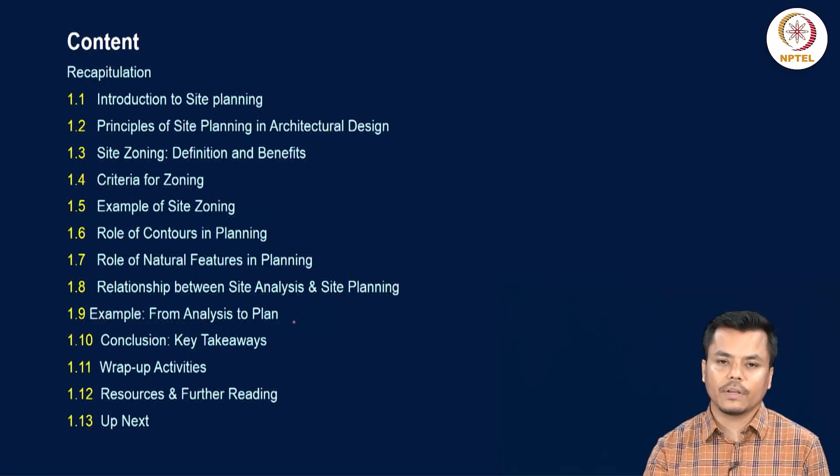To give a recap of what was covered in the previous presentation: we tried to understand what a design concept is and how we can develop a design concept for the various types of projects selected for architectural thesis or architectural design courses. We understood that the design concept is a central idea that directs architectural development and the decision making process. Its importance highlights its role in creating cohesive and meaningful architectural outcomes for the project. The types of design concept were also elaborated and discussed in detail.

We also discussed how translation of research helps develop the concept for the project, and some strategies to support the creation of strong narratives that communicate design effectively, with clarity and impact, to the examiner or the person who will review your work at a later stage. Case examples were also illustrated for practical application of various design concepts in architectural thesis.

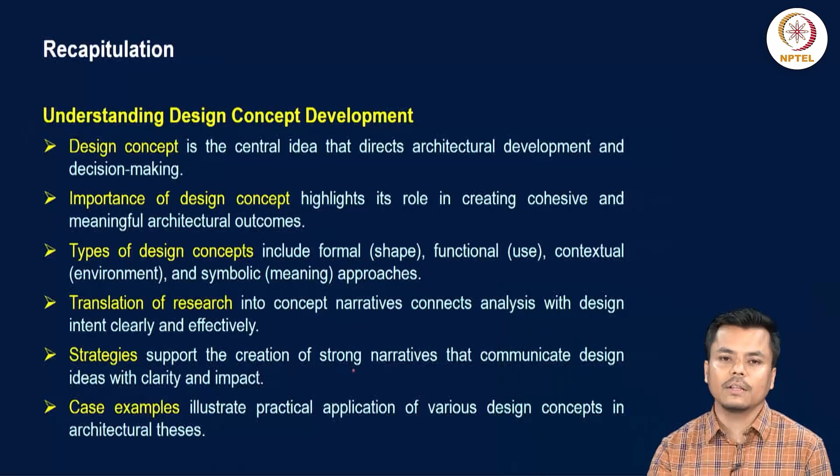With that understanding, let us now focus on the site planning stage. Once you develop the concept for your project, you will prepare the site plan - how you will place your different blocks, or arrange dedicated spaces within the entire site where a type of building will be developed. This is essential in case of projects involving scattered planning, which doesn't have much compact planning provision. In such spaces, you have to figure out the tentative areas within the site where particular blocks are going to come up, which is why understanding site planning becomes essential.

As defined by Kevin Lynch, site planning is the art of arranging structures on the land and shaping the spaces between these structures. It is also an art linked to architecture, engineering, landscape architecture and city planning as a whole. Site planning is the organization of the external physical environment to accommodate human behavior. It involves organization of land use, zoning, access, circulation, privacy, security, shelter, land drainage pattern within the site, and other factors.

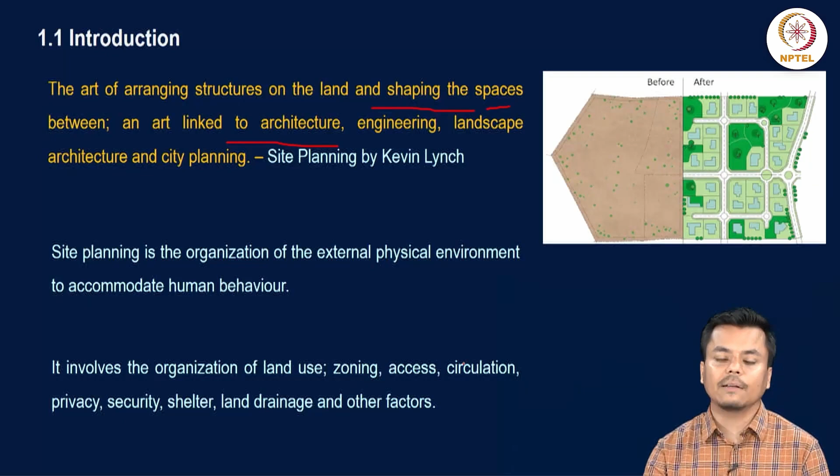Now let us look into the introduction to site planning. Site planning is an art and science of arranging land uses on a site. Why is it called both an art and science? It's science because the placement of a particular block, or how we orient or align the building in a particular site, is actually dependent on various factors mentioned previously - scientific bases on which decisions are taken regarding orientation in every direction, depending on the site analysis we do.

Likewise, why is it called an art? Because it also has to merge with the existing site features - what type of materials are used, or how we make our form such that it integrates into a coherent idea for the project. That is what makes site planning exercise both an art and a science. It considers functional needs, environmental concerns, and aesthetic values.

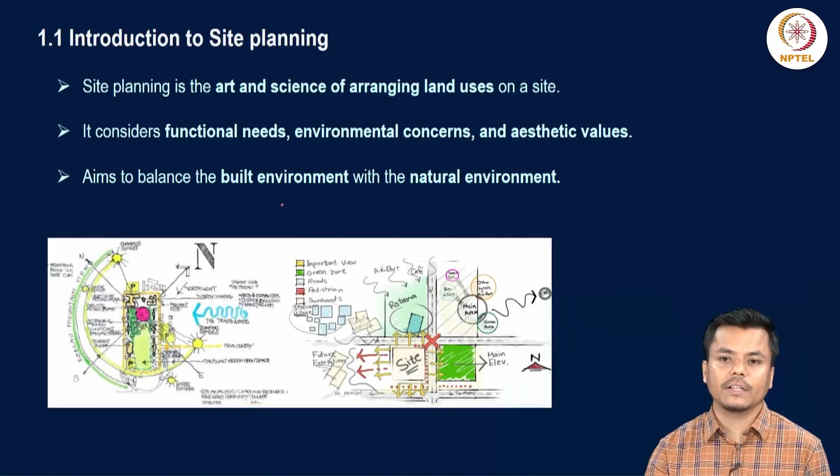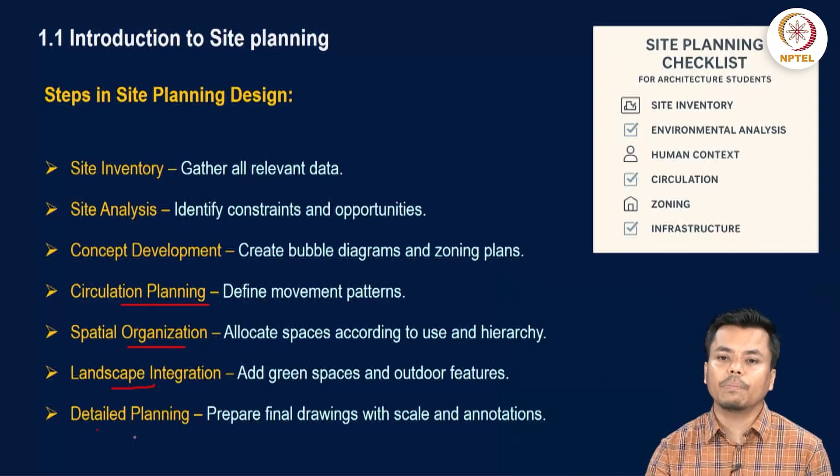It aims to balance the built and unbuilt spaces within the site. The steps in site planning design include: site inventory, where you gather all relevant data required; site analysis; developing the concept; circulation planning; spatial organization; integrating the unbuilt spaces so built and unbuilt spaces complement each other through landscape integration in the project; and finally, detailed planning of the structure.

There are different tools and techniques used for site planning. These include surveying instruments, GIS, CAD and BIM software, model making exercises, and environmental simulation tools to understand environmental factors such as sun path, wind flow, and shadow patterns observed at the site.

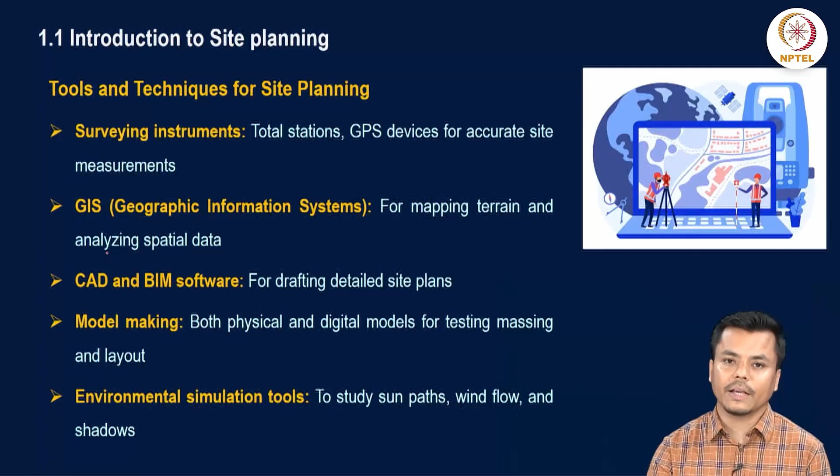Some common mistakes observed in site planning exercises: many students or designers ignore the topography of the site, which should not be done. Lack of drainage planning is another issue - if topography isn't understood and there's no drainage planning, water will accumulate in certain areas of the site during monsoon or extreme rainfall, which you would not want for your project.

Overlooking pedestrian movement within the site must be considered. Neglecting the cultural context should also be avoided, and inadequate tree protection - removing natural or mature trees - can increase environmental impact and reduce site appeal. These things are very important to consider in site planning.

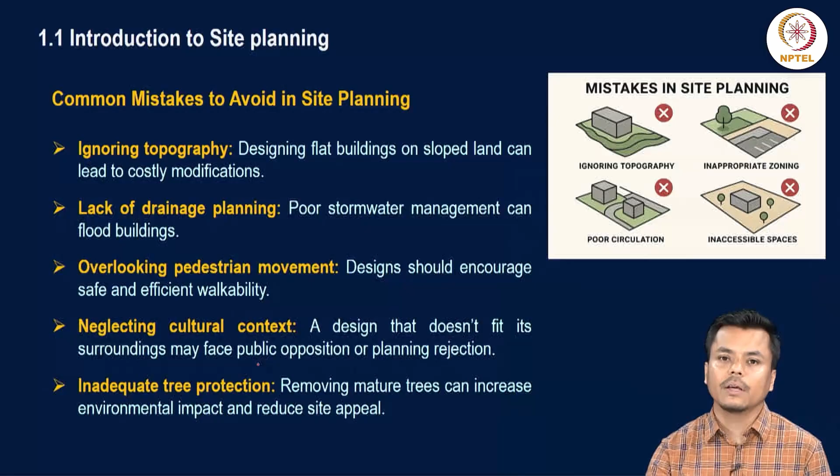Now let us look into the principles of site planning in architectural design. This is done through strategic arrangement - optimizing function and aesthetics through careful placement of landscape elements and structures. The built and unbuilt spaces composition, how much percentage is unbuilt versus built space within the site, all this strategic arrangement has to be very clear and detailed.

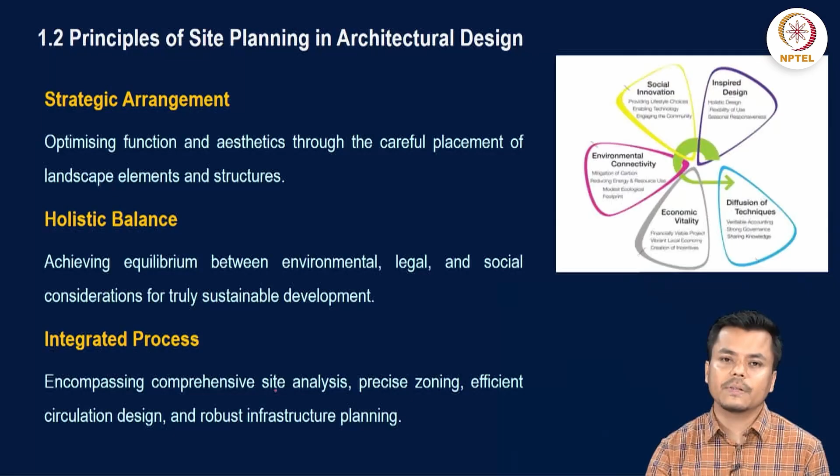The next principle is holistic balance - achieving equilibrium between environmental, legal and social considerations for truly sustainable development. Then integrated process, encompassing comprehensive site analysis, precise zoning, efficient circulation design and robust infrastructure planning, mostly applicable in large scale projects. These are some principles that must be considered for site planning.

Priority should be given to preservation of existing natural features, like water bodies or vegetation within the site, so that site planning retains these features. Detailed analysis of the site's climate, solar orientation, wind pattern and soil conditions should be done, so that the design you develop is an informed design process.

Arranging buildings and spaces to facilitate efficient movement, access and circulation for vehicles and pedestrians is essential, because within a site it's not just the building that has to be planned - there are other features that complement the building you design, which is why these features are very essential in site planning.

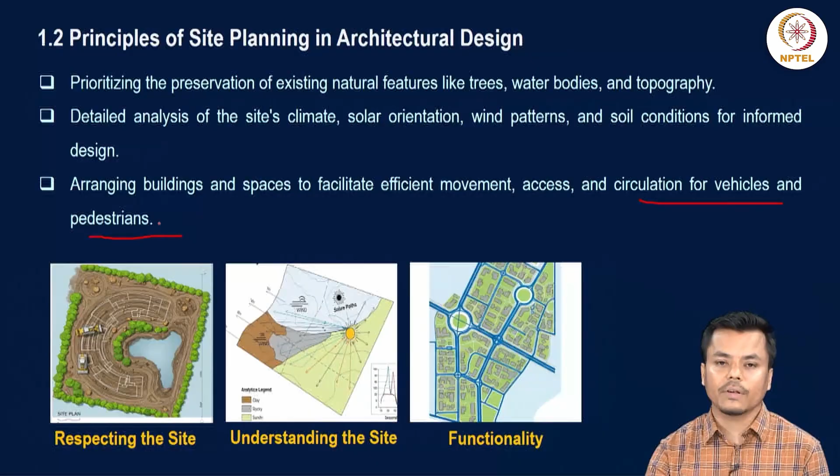Other factors to focus on include aesthetics, which makes your design appealing, and sustainability - minimizing environmental impact through strategies like water conservation, stormwater management and energy efficient design, enhancing the sustainability of your project.

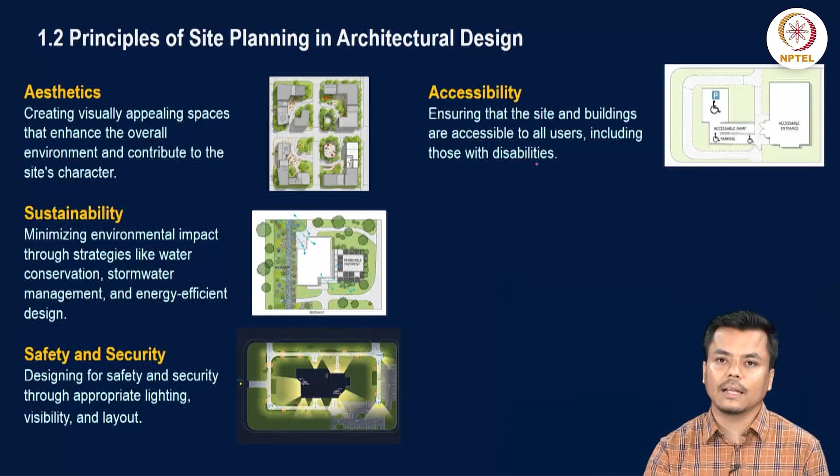Safety and security - designing for safety and security through appropriate lighting, visibility and layout of blocks - is essential. Then accessibility, ensuring the site and buildings are accessible to all user groups including those with disabilities. These things have to be dealt with in detail in site planning.

Let us now look into factors affecting site planning. The first is on-site considerations, including orientation, size, contours, trees, existing features or structures, on-site drainage, and soil typology present on the site. These features have to be understood, and they will guide you toward design development.

Off-site considerations include surrounding buildings, vegetation, any drainage on the existing site that must be properly mapped, road connectivity to the site, service layout around the site, and other details. These are all off-site considerations that have to be mapped and listed in detail.

Then climatic data - sun path, temperature, prevailing wind direction, amount of rainfall the site experiences, humidity, and local factors affecting the microclimate of the site. All this information is necessary and will guide you toward the orientation or placement of different blocks on your site.

Zonal building bylaws help you compute the permissible built-up area within the site, the minimum setbacks, and the permissible area within which you can start placement of the building within the site. This information is necessary in that case.

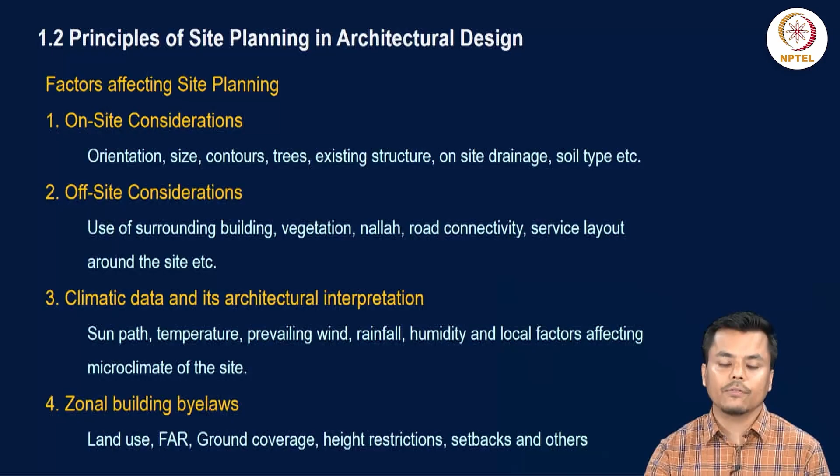Now let us look into site zoning, its definition and benefits. Zoning is a process by which we subdivide land into different zones for specific purposes like residential, commercial, recreational, and these are very relevant in the sense of a large city scale project.

When it comes to an architectural project, especially at an undergrad level, you can interpret this in a way that when you start site planning within the site, if it is scattered planning, like if you are designing a university or a hospital within a site, there will be a few different blocks like emergency, OPD, IPD department, accommodation for staff, and even other ancillary facilities like pharmacy or specific residential blocks for patients, relatives, or staff and nurses.

These are the different blocks or activities for which you may require a scattered planning approach, since the planning of these spaces may not be possible through a compact planning approach. In that case, you have to scatter the uses of the building and accordingly identify the best area within the site where you can design these buildings.

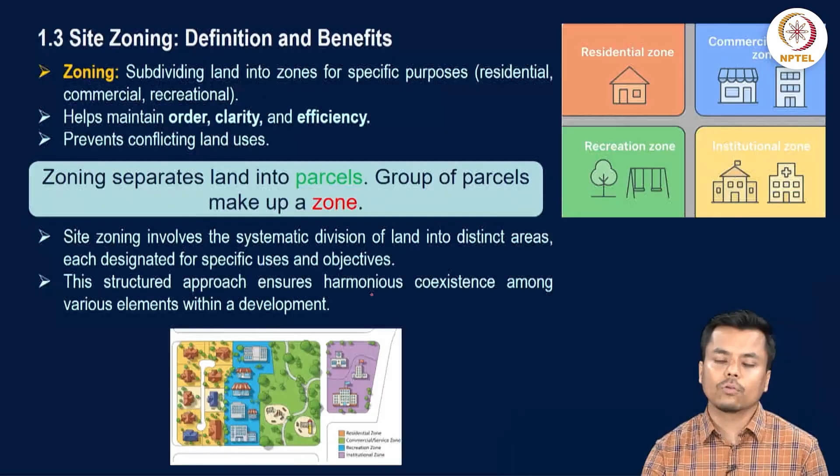This is how site zoning becomes essential, and it also promotes safety - you prepare a dedicated route for the movement of vehicles and a dedicated route for the movement of pedestrians. This enhances safety within the site through site zoning or site planning.

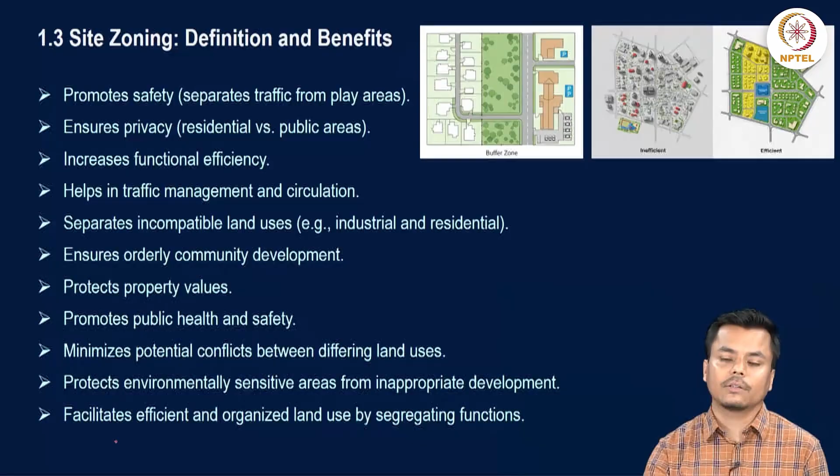It ensures privacy, increases functional efficiency, helps in traffic management, separates incompatible land uses, ensures orderly community development, and there are other benefits that we get through site zoning.

The criteria for zoning includes land capability - assessment of soil composition, slope gradient, and environmental sensitivity to determine suitable land uses. Use compatibility is also a criteria, ensuring that the adjacent use of a particular building doesn't disturb the use within the specific building. This has to be understood - how and what different blocks can be kept near each other - which is understood through zoning in your site planning.

Then accessibility and circulation - designing efficient pathways and access points for smooth movement of people and vehicles becomes essential. Infrastructure support, evaluating the availability and capacity of essential utilities and infrastructure to support proposed design development, is essential in that case.

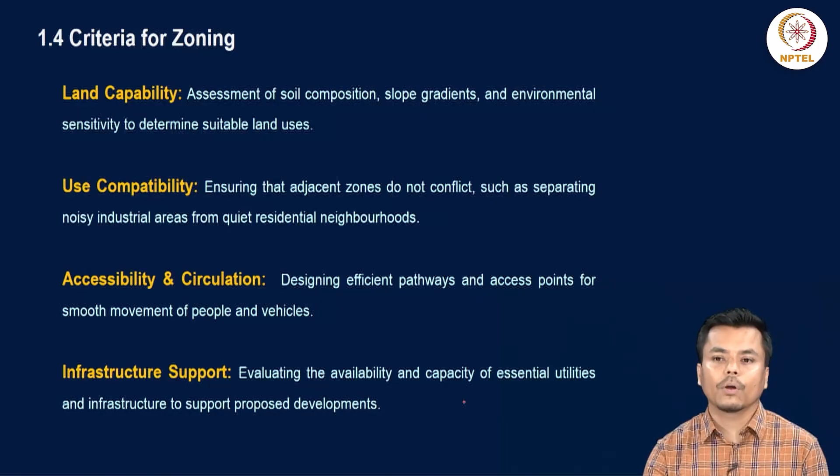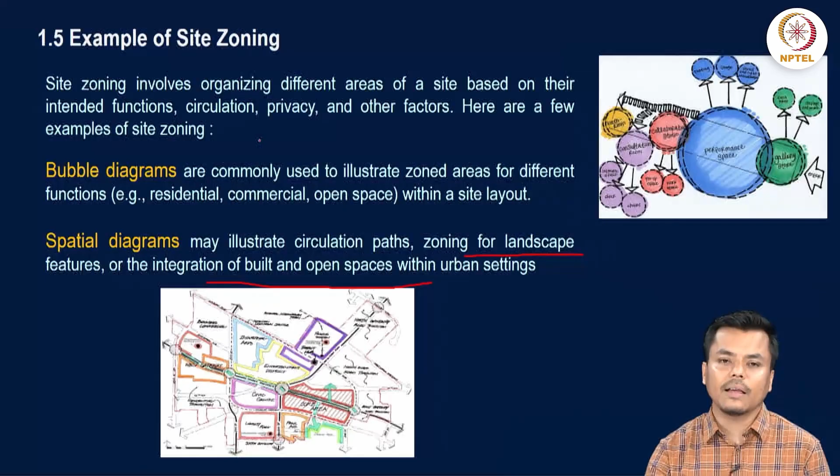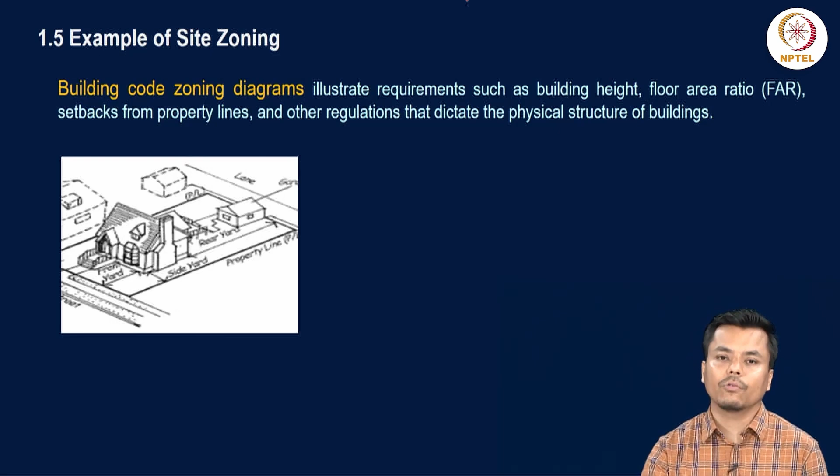Also, building code zoning diagrams illustrate the permissible building height that can be built within a space, floor area ratio, setbacks from property lines, and other regulations. These guide you towards the legalities of the site, ensuring the building you design complies with the legal framework in that particular city.

Then another factor that helps you in site zoning is the environmental aspect. This includes understanding the sun path, wind patterns - from where do you get cool air during summers, or from which direction do you get very harsh cool breezes during winter season.

You have to do your site planning in such a way that you can block winds during winter from entering the building, or if there is hot air or loo that enters the building, how can that be blocked during summer season, allowing only cool air to pass through the building. These strategies and design interventions are possible through proper site planning exercises.

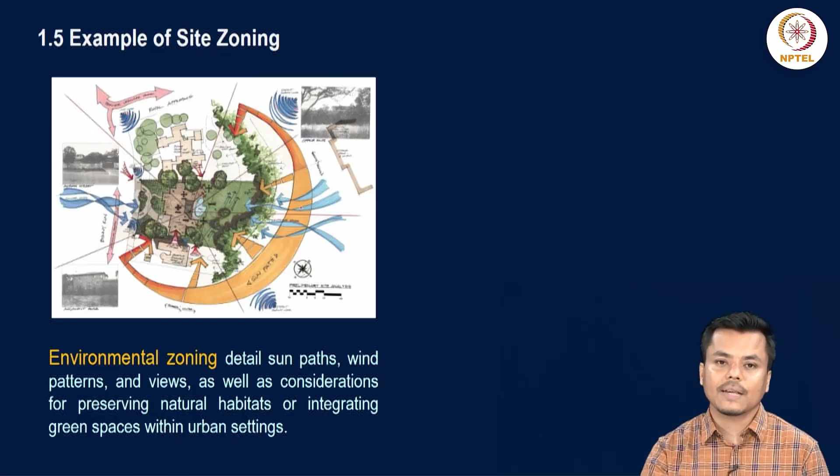Other examples of site planning include university campus design. There are certain different land use zones within the university - for example, accommodation for teachers, accommodation for staff, accommodation for students. Likewise, there will be a dedicated silent zone, that is the academic zone, sports and recreation zone which will be full of noisy activities, and then the service zone for circulation movement within the site.

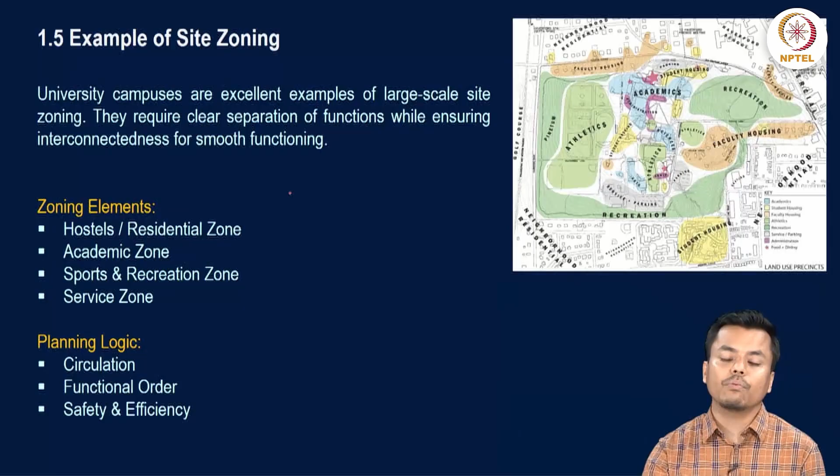All these are different zones or activities that happen within the site. How do you plan these activities? They cannot be planned together in one building, so you need to go for scattered planning so that there is minimal disturbance from one activity to another. That is why site zoning is very important in such cases.

Let us now look into the role of contours in planning, because this is very essential in case your site is located in hilly terrain. The topographical insights like contour lines serve as invaluable indicators of the site's topography, revealing critical information about slope, elevation, and the natural drainage pattern present in the site.

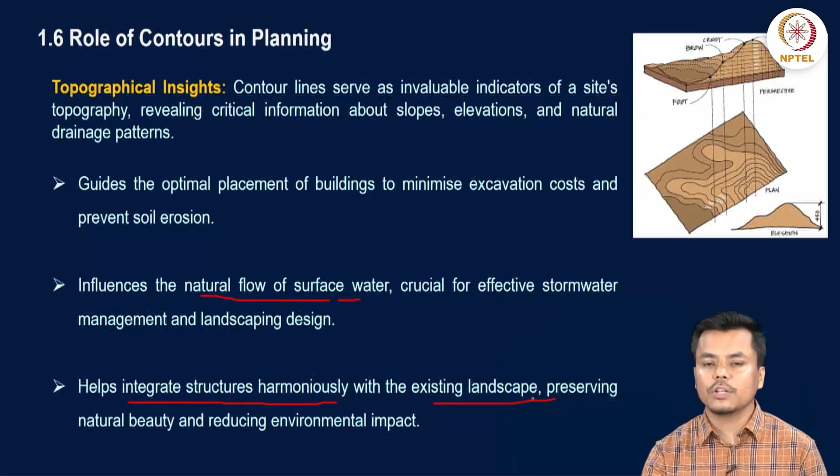Contours guide the optimal placement of buildings, influence the natural flow of surface water, and help integrate structures harmoniously with the existing landscape. These are the benefits when you integrate contours in your design, and you also have to think that contours are lines that represent elevation levels.

So these are hypothetical lines that we draw for ourselves, for our understanding about the height differences that is there in the site. It helps in understanding site slope and terrain, guides drainage planning to avoid waterlogging within the site. Building placement follows the natural slope, which reduces the earthwork and excavation, determines cut and fill quantities in certain locations, and aids in designing roads, retaining walls and landscaping within the site.

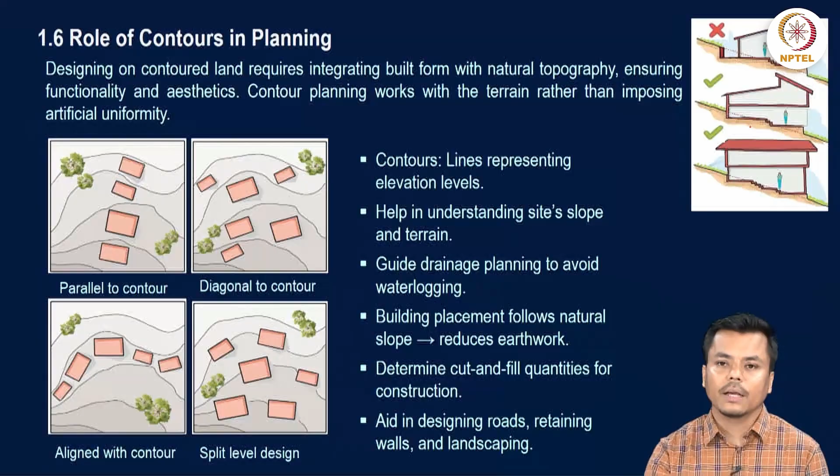So the role of natural features in planning, as already mentioned, the natural features commonly observed within the site are either trees, natural water bodies, or rocks or hills that are there in and around the site. These features influence the microclimate and provide the aesthetics to the site, so there has to be minimal disturbance to these natural features.

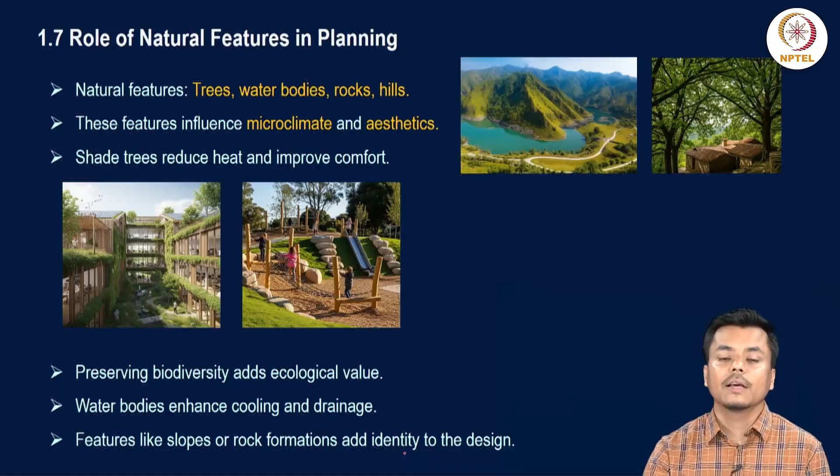If there are existing trees, they provide shade and minimize heat gain within the site, so you should try to retain the existing trees. Preserving biodiversity adds ecological value to your site planning exercises. Water bodies enhance cooling and drainage in the site, and features like slopes or rock formations add identity to the design. These can be very well integrated into the design process.

Let us now look into the relationship between site analysis and site planning. Site analysis is the foundational phase involving the comprehensive gathering of data on climate patterns, geographical characteristics, legal constraints and existing infrastructure. It is a process by which we understand the natural and man-made conditions, like studying climate, soil, access, vegetation, topography, and analyzing the implication of these features into the design.

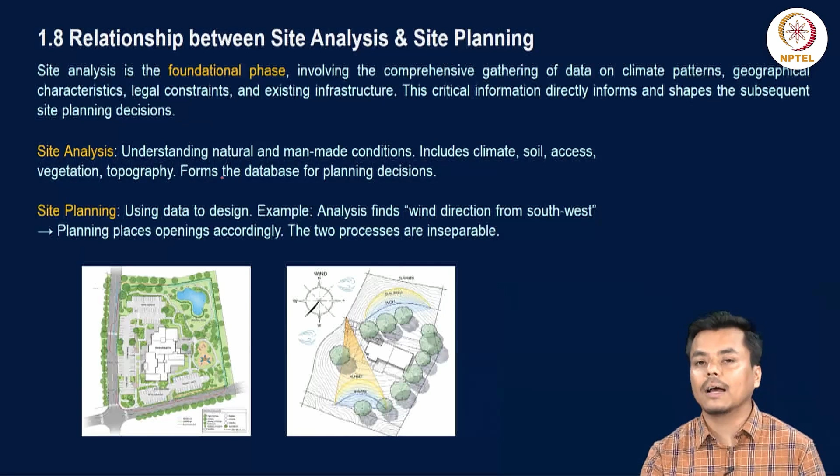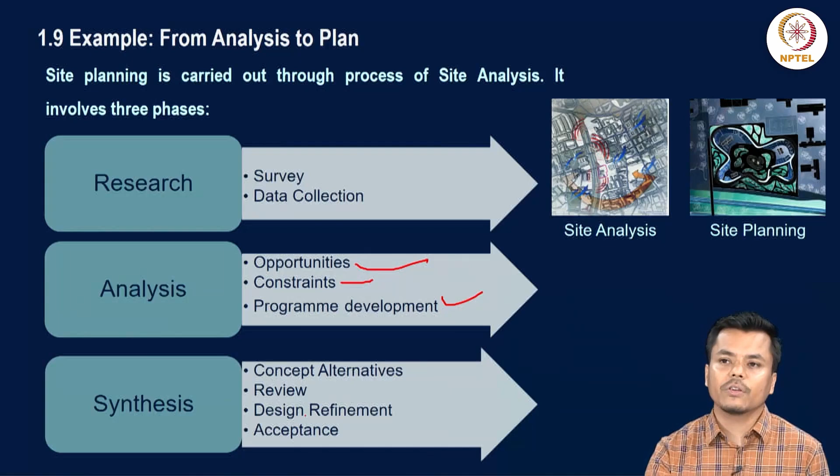In site planning, we use the implication or the data generated from site analysis for the informed decision making process. The analysis helps in the research stage, where you do data collection and survey of the site, then analyze the data you have collected. You identify opportunities and constraints, develop the program for the project, and then synthesize this information to start the site planning exercises.

So to wrap up what we have learnt in this presentation, site planning is a foundation of architecture. It integrates environmental, functional and social factors. We achieve harmony through a balanced approach between man-made and natural features within the site. Good planning in site planning exercises leads to cost-effective design, and a sustainable, user-friendly design approach provides long-term adaptability and growth within the site.

These are informations very much relevant to a site planning study. You should try to follow this information and go through the content of this presentation as you start the site planning exercises, so that the work you do in the site plan represents the previous learnings you have completed from different sources.

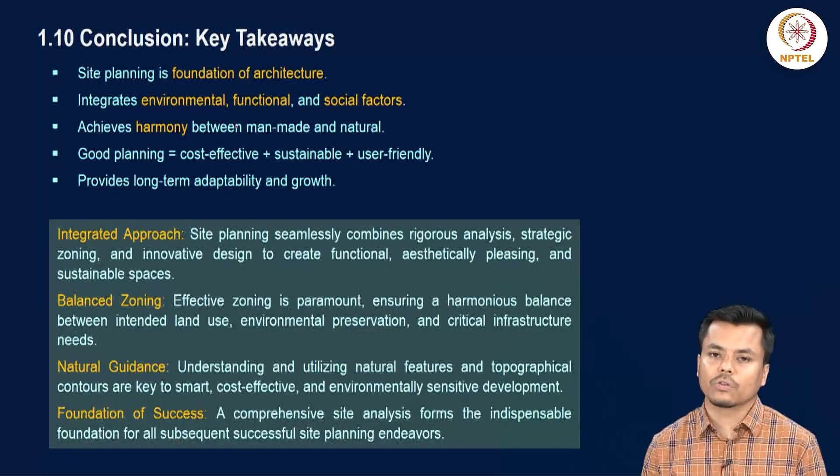So these are a few activities that you can do at the end of this presentation. For example, you can identify real life examples of natural features that have influenced site planning by either enhancing or limiting the options. That is, when you do the case study, try to see how the natural features were integrated into the site planning exercises.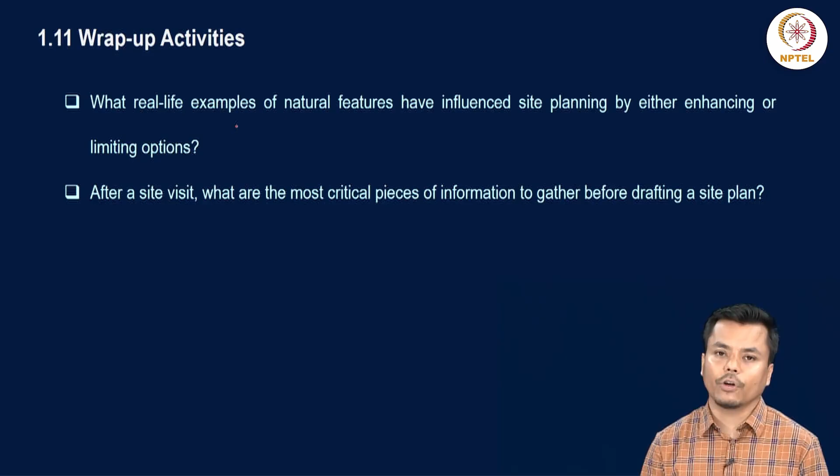These informations are very essential, and after the site visit you do for a particular project, try to jot down the critical pieces of information that can lead you towards the site planning exercises. This can help you come up with a better site plan for your project. These are some resources that you can refer to for your understanding of site planning for projects.